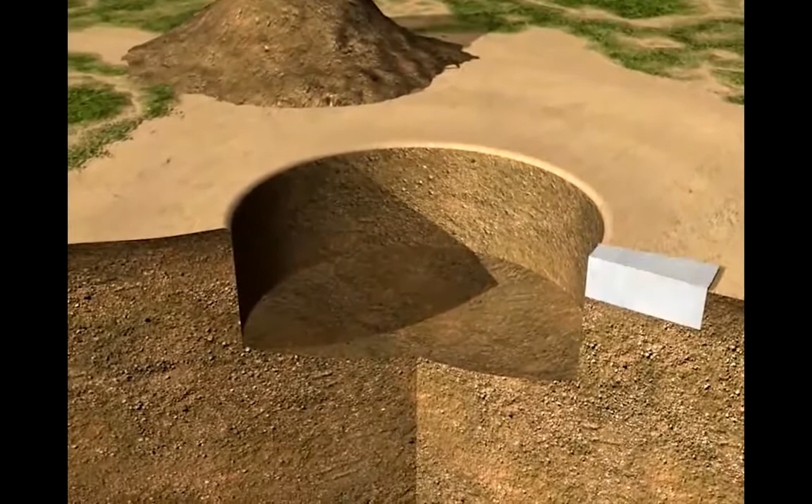The initial section is excavated 1 to 2 meters in depth. A support concrete ring beam is installed. It acts as a guideway and takes the forces from the shaft sinking process. The first segments of the shaft are assembled and lifted in place. These segments have an integrated steel cutting edge, which will act as a knife during the shaft sinking.

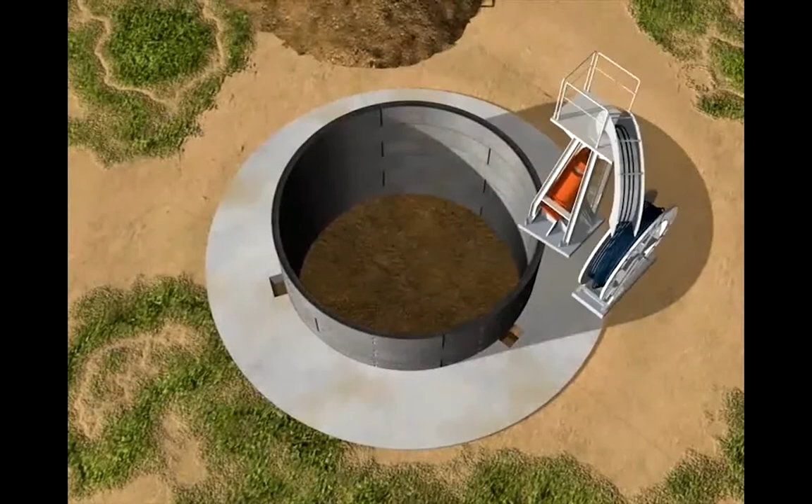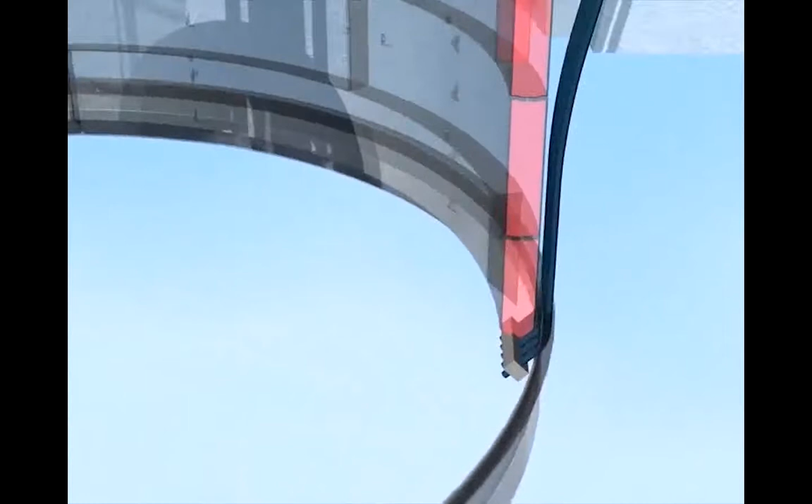Strand jacks are installed on the support concrete. Strand wires are connected to the first segments. The number of strands corresponds to the total weight of the shaft. The shaft is now held in position by this compact strand jack system. Preparation for the machine installation starts by using a dummy frame to position the attachments for the machine, which are then welded to the steel plates cast into the concrete segments. The VSM machine is assembled to suit the shaft diameter and lifted into the shaft by a mobile crane and fixed onto the attachments.

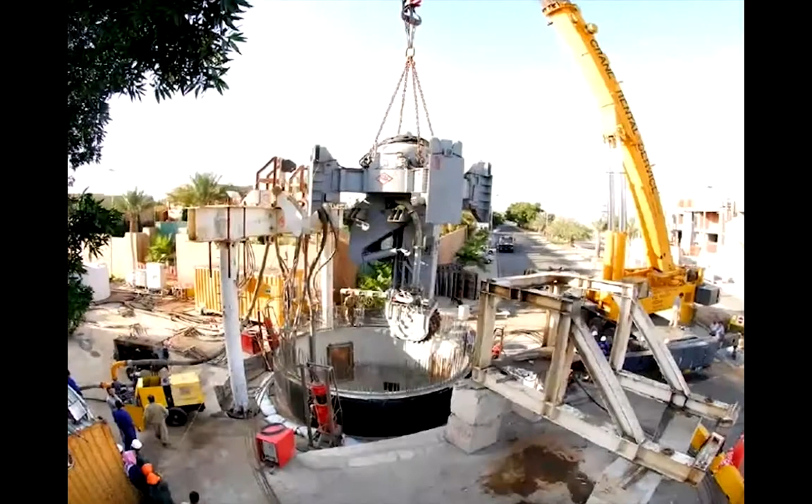The rest of the shaft sinking equipment can now be installed. The winches are for lifting and lowering of the machine, for maintenance during shaft sinking, as well as to lift it out when the shaft is complete. The energy lines supply the machine with all necessary power and communication.

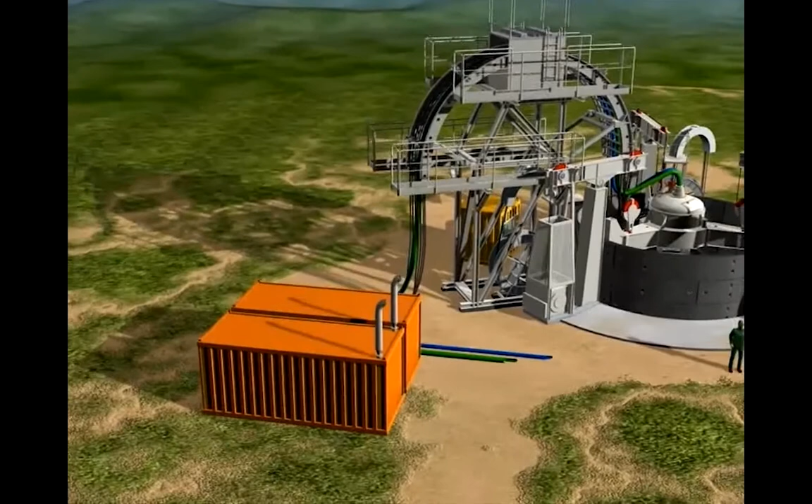This is an example of a complete site setup. All operations are powered and controlled from the container on the surface. Sensor data, together with the position of the cutter boom, is shown on a graphic display, giving the operator full control of the excavation and sinking process. The cutter boom can either be controlled manually by the operator or set in automatic mode for cutting the set profile in a required section.

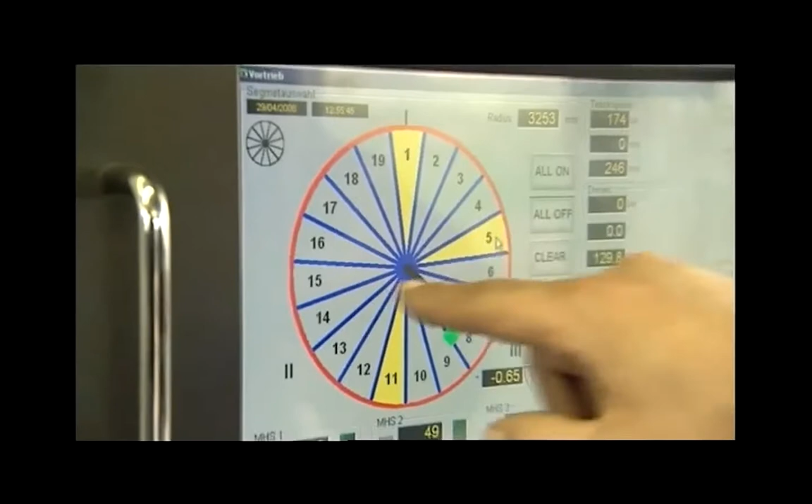The shaft is kept full of water during sinking to balance the level of groundwater in the surrounding ground. Various depths of groundwater level can be handled. The flexibility of its telescopic arm rotation and slewing movements allows the cutter boom to work in shafts with an inner diameter of 4.5 meters to 11 meters, in water depths up to 80 meters.

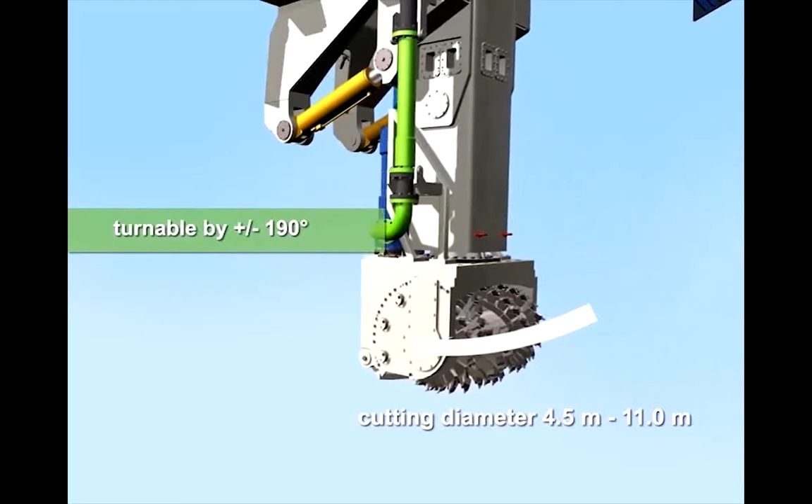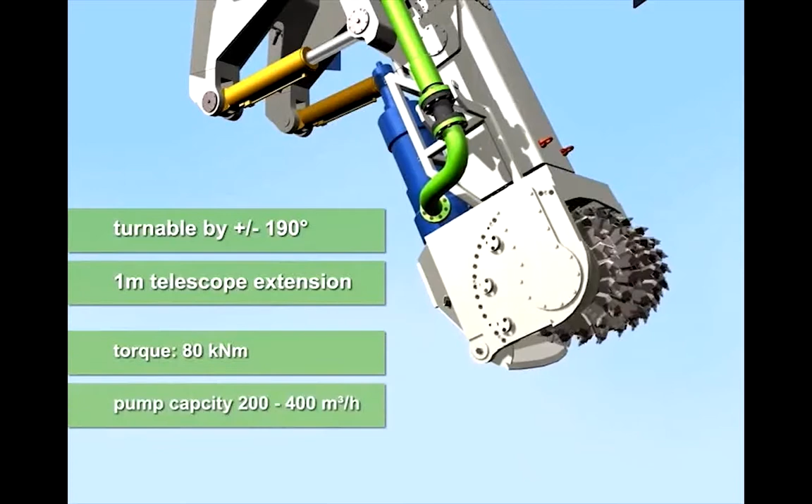The cutting arm moves radially from the center to the outside of the shaft. In soft soil, the cutting edge on the shaft is able to trim the excavation as it sinks into the ground. The cutting speed and the movement of the boom can be varied to achieve the best excavation rate. When it is necessary to excavate under the cutting edge, the machine can be fitted into an alternative position that is 1 meter lower.

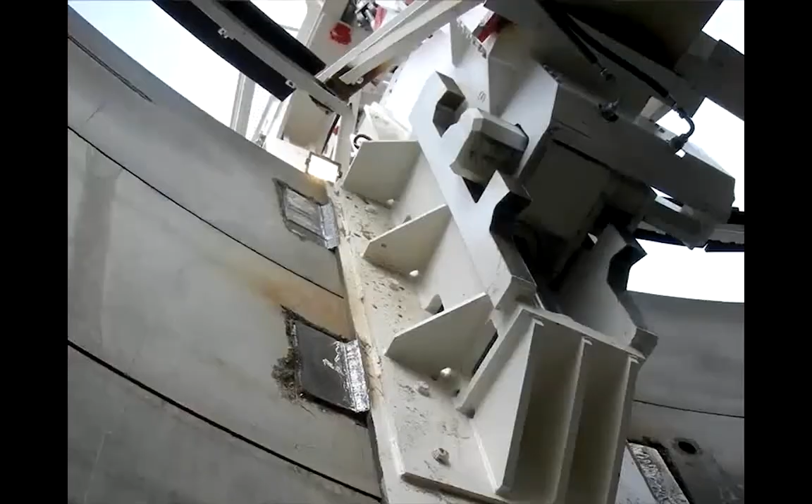Where hard soil is encountered, the machine cuts out to the program limit all around the circumference before the shaft is lowered. In rock, this controlled descent allows all of the cutting edge to be cleared before lowering. This avoids either trapping the cutter boom or causing the shaft to deviate.

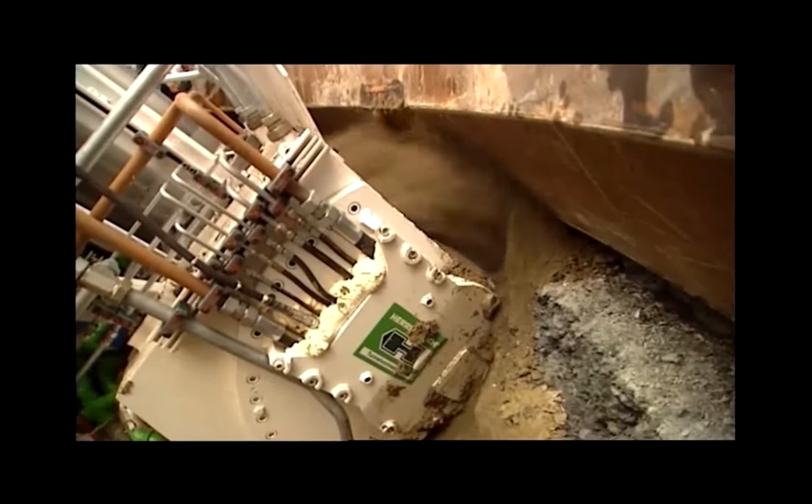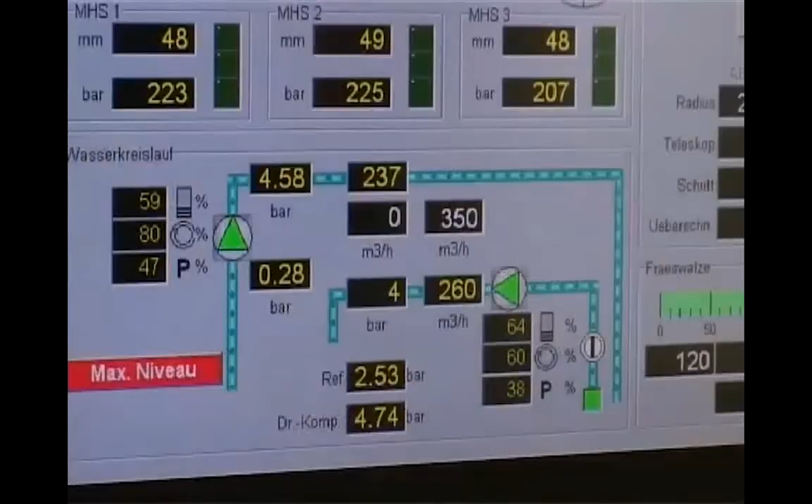A slurry circuit transports the excavated material from the shaft to a separation plant on the surface. The cutter drum cuts and crushes the material to a granular size that can be handled by the integral pump. In sticky ground conditions, an additional high-pressure feed line can clean the cutting drum. The separation equipment is selected to suit the local soil conditions.

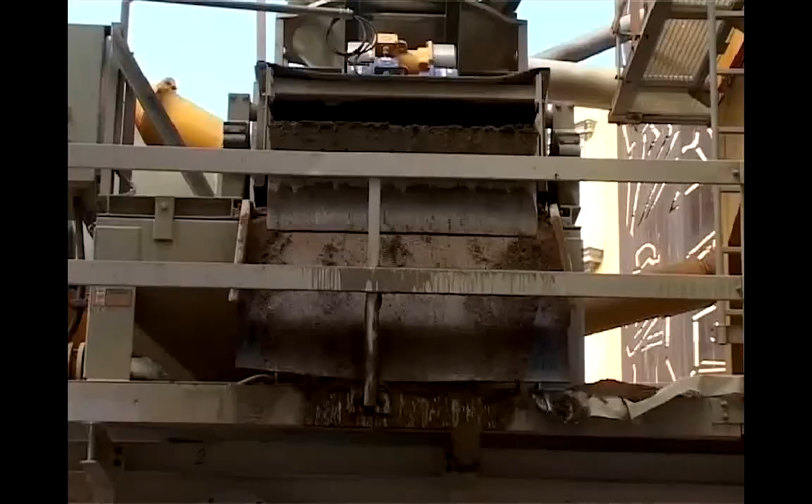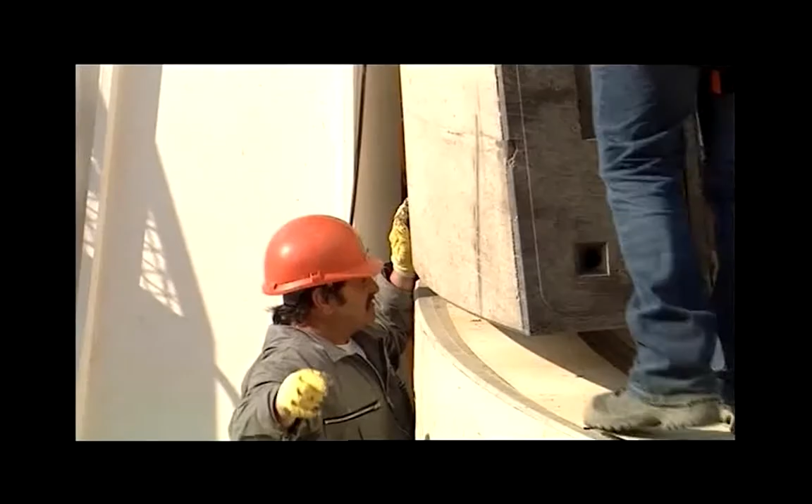Precast concrete segments with rubber sealing gaskets are bolted in place on top of the shaft. This can be done at the same time that the machine is excavating at the bottom, so the shaft sinking can go on continuously. The molds for the segments are also supplied as part of the shaft sinking equipment package. Segment dimensions are designed to suit the shaft's purpose. The daily sinking production is in a range of 1 to 5 meters, depending on the diameter, geology, and working hours.

As an alternative to using segments to form the shaft, in-situ concrete can also be used. Formwork designed for the shaft diameter is used to concrete the shaft lining in lifts of about 2 meters in height. The sinking process is the same as for shafts constructed with segments.

This can be an advantage, for example, when the shaft is used to launch utility tunneling machines. The shaft wall can then be prepared with a built-in launch eye to suit exactly the tunneling equipment.

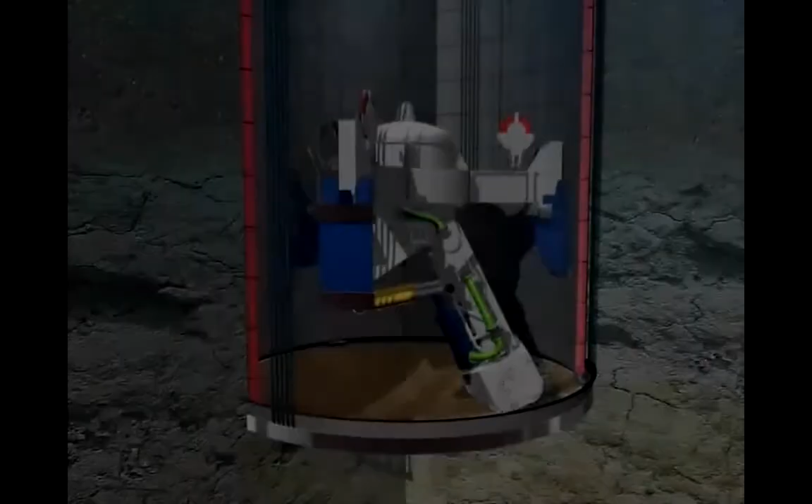An automatic lubrication system reduces friction during shaft sinking. The total number of nozzles is designed to suit the soil conditions. When the shaft is sunk to the required depth, the VSM machine is removed and the base plug concrete is cast. When the base concrete has gained sufficient strength, the water can be pumped out. The shaft construction has been completed without affecting the groundwater or the surrounding soil. The shaft is now ready to be used.

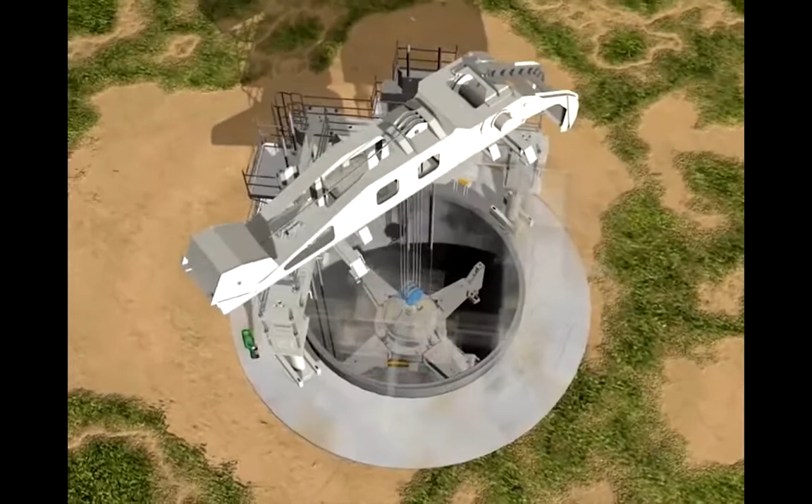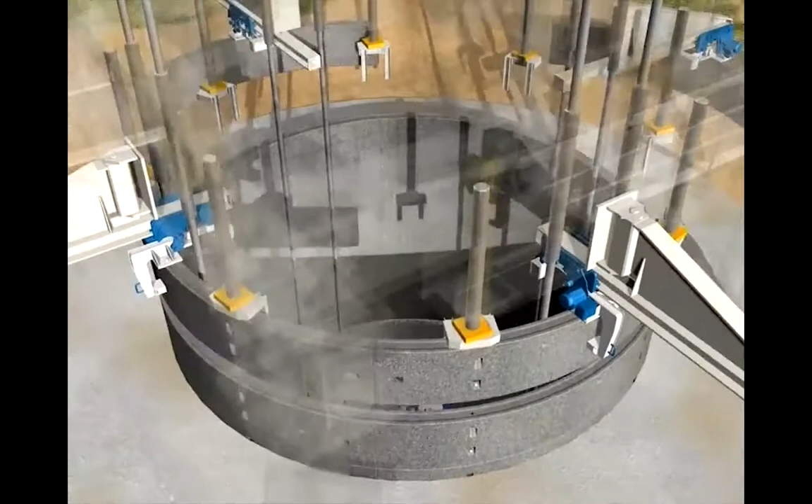History: up till now, our VSM technology has been deployed for several applications. Here are some examples. For shafts up to 80 meters deep in St. Petersburg, Russia, the design also included the facility to push with up to 2,000 tons due to expected big boulders and complicated geology. The design is like a factory for continual production, and this was used for a number of shafts in Moscow.

A machine has been built for dry excavation in soft to medium hard rock. The design includes a VSM machine at the bottom, rock bolting, and shotcrete sprayers above. Blind sinking procedures will be developed further, so in future various combinations can be used for the best technical solution.